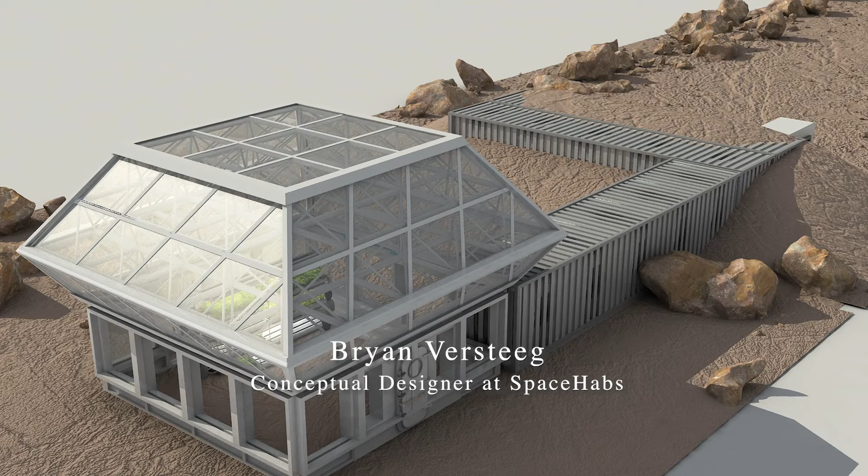I'm going to talk about the early conceptual designs of the layout for the SAM accommodations. I'm very excited to be part of this project. I think it's going to be an extremely useful facility, and I'll probably want to spend a fair bit of time there myself.

I'm a conceptual designer in the architecture and engineering industries, and I've been focusing on space exploration for about 10 years. What I've been doing is helping to explore the potential of this space and make sure we can get as much out of it as possible. I'm going to show you some of the early designs, which at this point are more to keep the discussion going, so that we can engage the most number of people and ensure we create a facility that is the most useful to the most number.

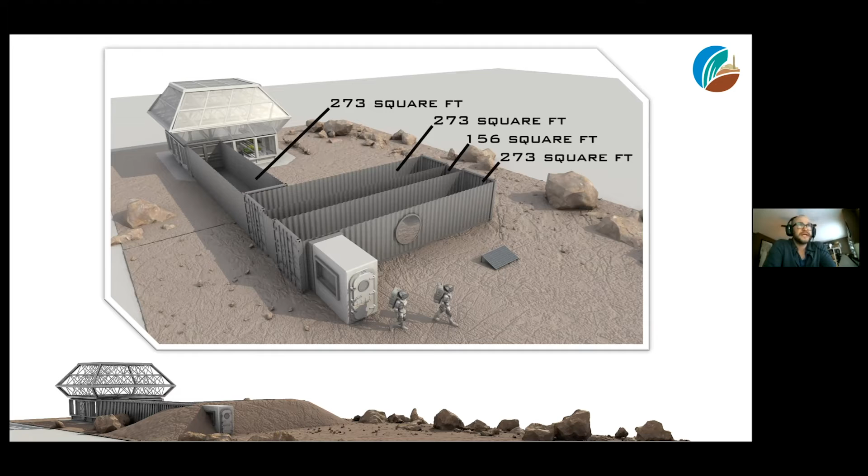To start with, we've been talking about using cargo containers to define the structure. At this point, we're talking about 3 cargo containers. Each cargo container, once we finish the inside walls, plumbing and electrical, gives us a clearance of about 7 feet across and 39 feet long or so. That's the inside dimension, about 273 square feet per cargo container.

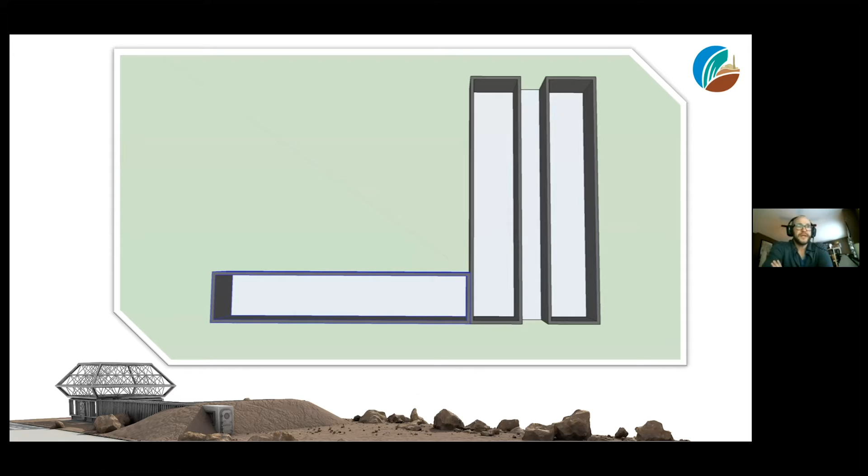This is a view with all the roofs taken off, so we can get an idea and see inside it. If we lay these out, we have 2 together and a long one that heads over towards the test module, which is the glazed enclosure.

The 2 that are side by side, in order to economize on materials while maximizing space, we've talked about putting a 4-foot corridor between the 2 modules. This requires a minimal amount of material to enclose, but because the modules only have clearances of 7 feet each, there's really not a lot of space to do things within that, if you also have to have a corridor or hallway with enough room to walk through. So that brings us 7 feet down to about a 4-foot clearance.

If we have the center corridor for our walkways, it means we have a lot more space to play with, and we can actually create more usable spaces. So I'm going to talk about a couple of these spaces.

First is this corridor that heads to the test module. The test module will be on the left-hand side, and we have a room that'd be an airlock that goes into the test module. This first corridor is really a working corridor.

At this point, we want it to be a versatile space. I've shown it having a bunch of different uses, and it could be used differently for every mission that uses the facility. There'd be some common equipment, like work tables, we could have some 3D printers, and some storage. If you had repairs to do, this is probably where you'd do it. A lot of the space could be left open for things like exercise space, or if you wanted to do some smaller hydroponics, depending on the use, a lot of this could just be wide open so each mission could bring in their own equipment.

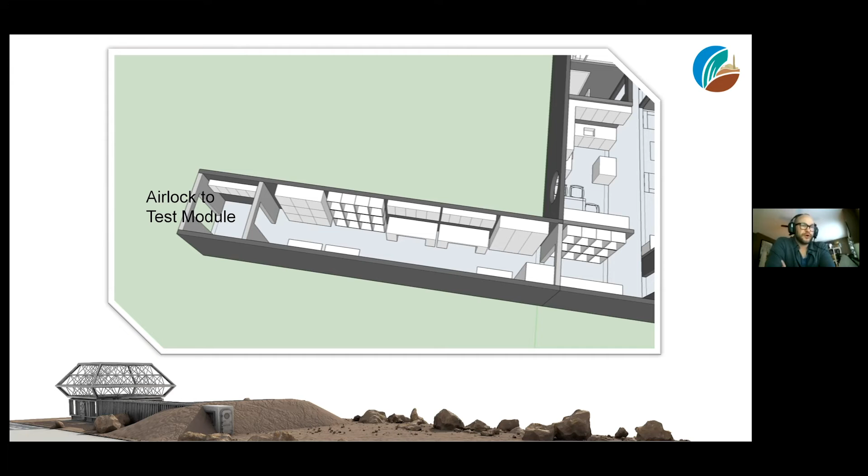To move into the crew quarters, this is doing some space layout to see how we could accommodate all the different needs of the crew.

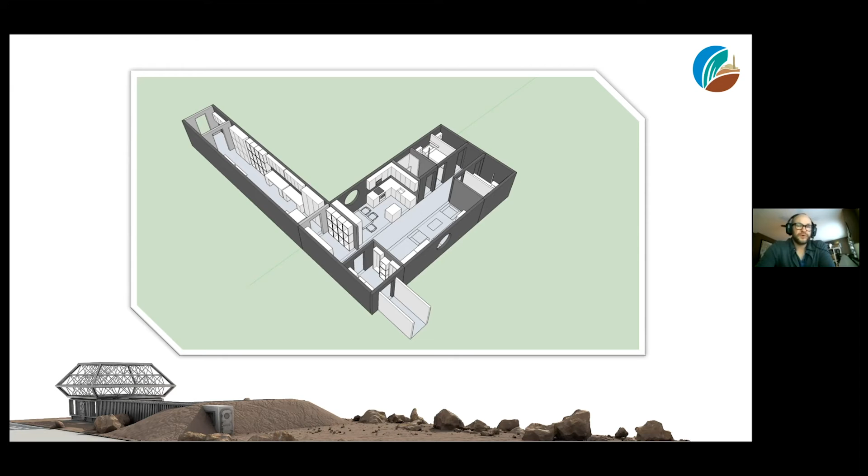One of the main things is we're really limited by floor space, we don't have a lot to work with. We're trying to figure out how best to accommodate a crew of up to 4 people, and ideally they have to have private sleeping quarters. But how much more they have, we have a couple of different options to work with, and it goes from quite literally enclosed bunk beds to something a fair bit larger. None of our varieties have anything luxurious, and we're trying to figure out the best use of space while still accommodating the needs of the user.

Something like this would take up very little floor space, roughly 11 square feet per person, because we're stacking these enclosed bunk beds essentially.

They could have a hard door that closed shut, so you would have sound buffering and full privacy within, but not really a lot of room to do anything else in there. So it could be limiting to the type of people who would apply.

So there's a lot of different ways to think about how much space we're going to use. This is more volume than each crew member would have on the International Space Station, but still a lot less space than a person would have in a small dorm room or something. So we're trying to figure out where's the happy medium.

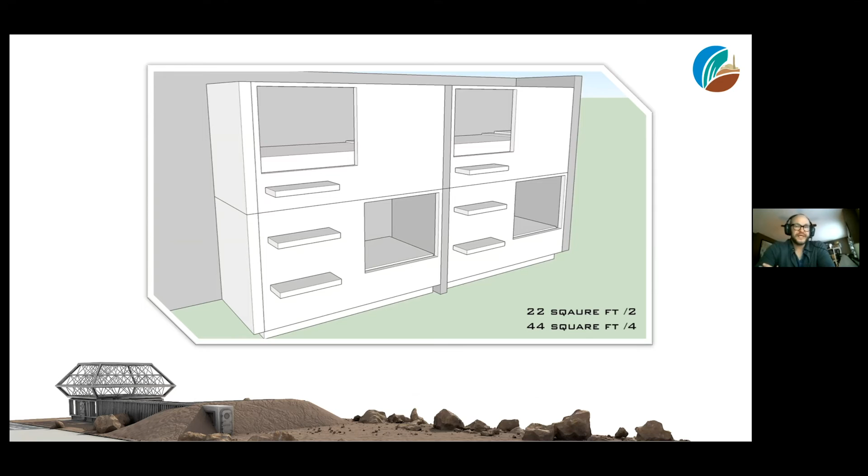So this is a version we've been talking about as well. It's a zig-zag accommodation, essentially bunk beds, except each bunk is actually in a different room because we've staggered the rooms so that the beds take up the same floor space as if they were just bunk beds, but we've attached a living volume next to each bed.

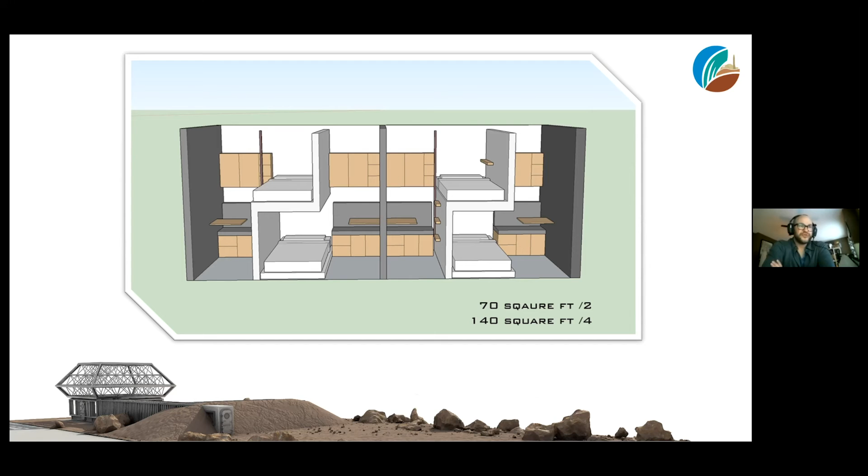So each person has the accommodations that they would generally find in larger rooms. If we look a little closer, what's not shown here is there would be a wall enclosing this. I've just taken the wall out so we can see inside. The wall gives you complete privacy. It's a full height space, so once you walk into your room, you can stand up, you can change.

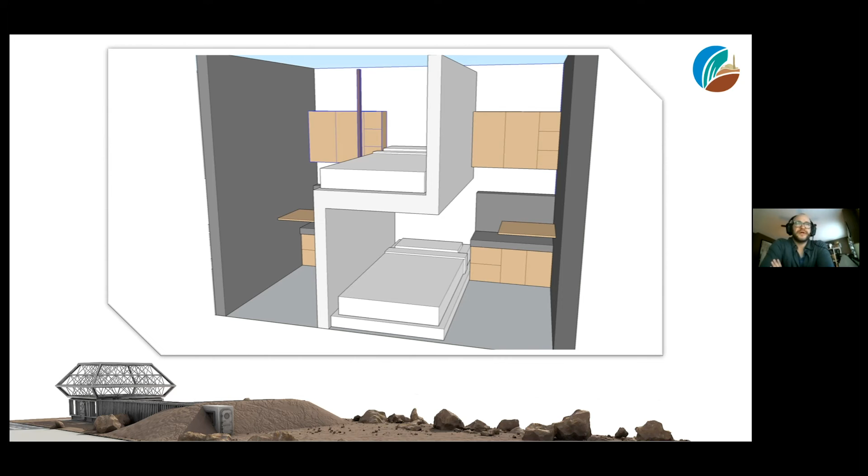Each room has its own bench and chair. There's a fair bit of storage for personal effects, and a table that folds down from the wall if you wanted a private working area or a desk. So this gives a fair bit of versatility to the spaces. Everyone gets a fair bit of space that's private to them while still economizing the total square footage we have available.

So to talk about the residential area, the crew quarters, the social area, we've got a kitchen, table for eating. The table can be multi-use, could be workspace if needed. On the left-hand side there's the airlock, which heads out to the field or to the Mars yard.

And then inside that there's the EVA storage, where we're going to store the suits, boots, or equipment that you'd be bringing outside. This is kind of a dirty room so that none of the things that go outside actually come all the way into the crew quarters. This is the intermediate zone right here.

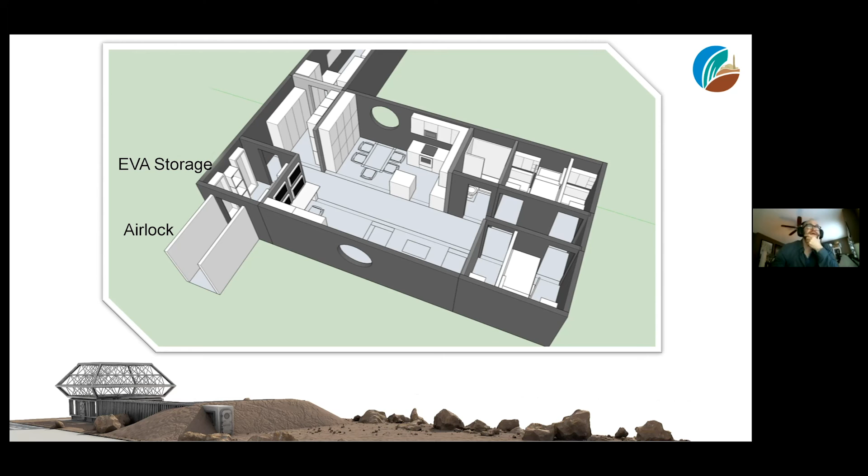And then we flip this around so you can see the other side. There's a versatile working space, which could be configured so that it would be good for up to 4 people. There's couches, there's chairs, so there's a place to be comfortable, as well as an enclosed bathroom, and everyone gets their own bedroom.

Ideally this is a very versatile space. As much as possible is mobile furniture that can be reconfigured, with a certain amount of reconfiguring available for each mission that comes in, so that depending on their needs, they'll have the spaces available for them.

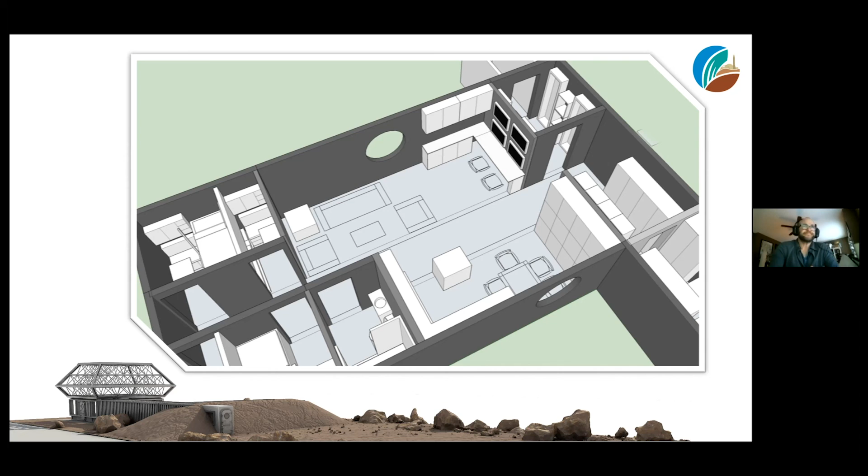And that's really about it. At this point, this is more to elicit more conversation. We're still looking for comments, suggestions, requests. If there's something you'd really like to see that this should accommodate, bring it up sooner than later, and look forward to hearing any feedback. So thank you very much.

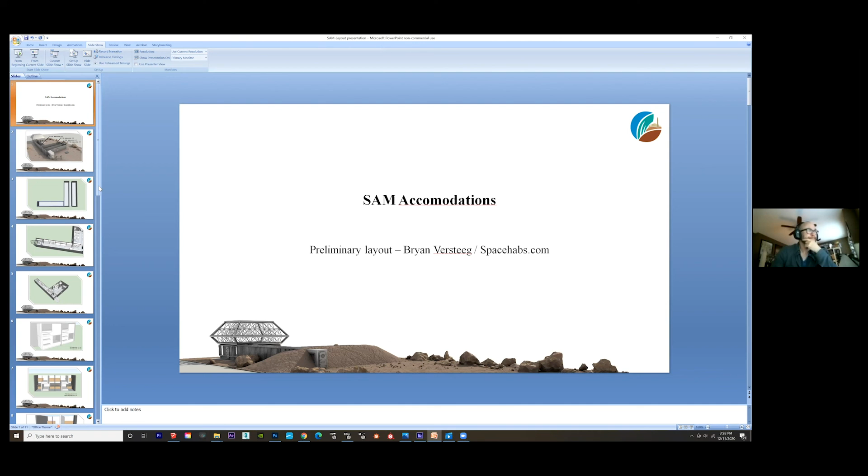The only thing you may not like is that since our last on-site visit, we've come up with a new layout. So we're going to have to shuffle things around a bit, but I think I understand why we're doing it. It's not that big of a change, mostly the same, just a little bit of a shuffle, but thanks again. Yeah, my pleasure.